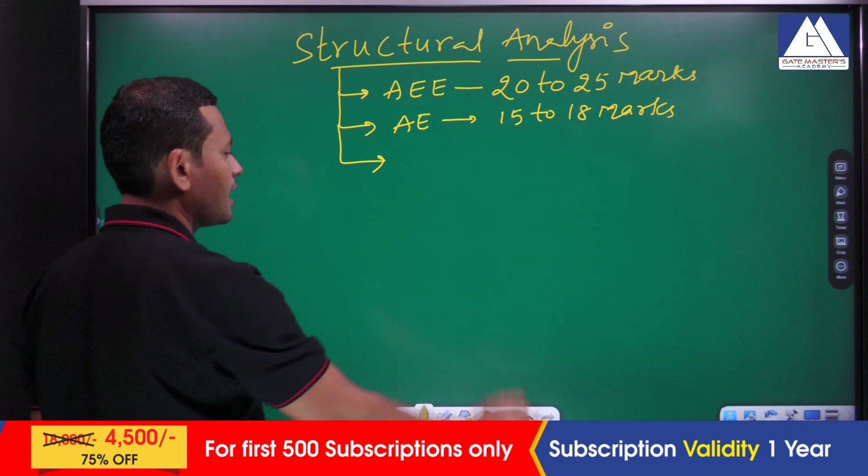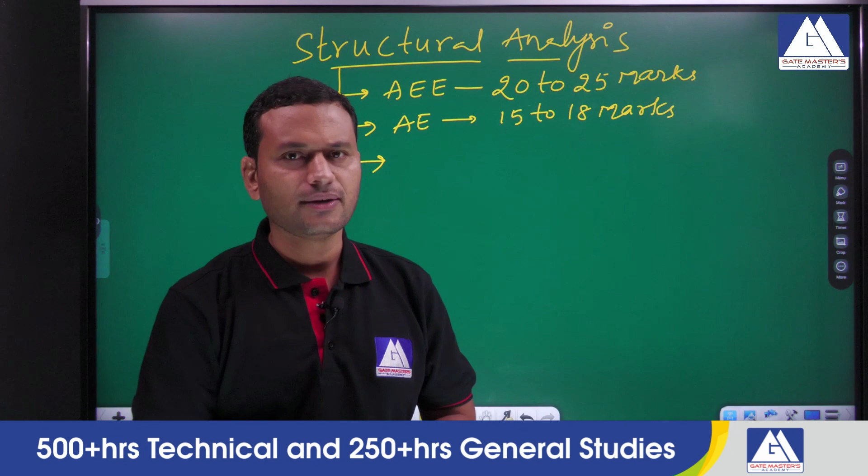Now if you look at the weightage in engineering service, it has two levels of examinations. One is the prelims examination, an objective exam, and the other one is mains, which is descriptive. In the descriptive exam you can expect about 80 to 90 marks, but in the objective, where all the subjects are given in a single paper, you can have a weightage of about 15 to 20 marks.

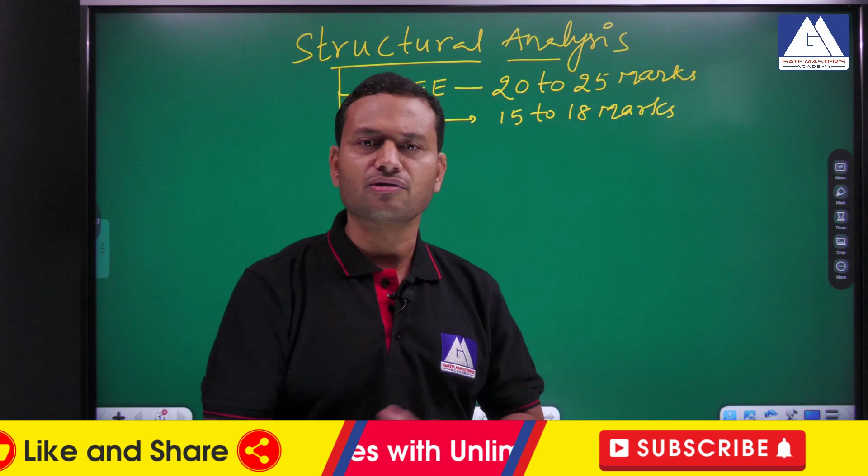And in SSC JE you can expect about 10 to 12 marks, because SSC JE is generally diploma level, so the weightage will be comparatively low.

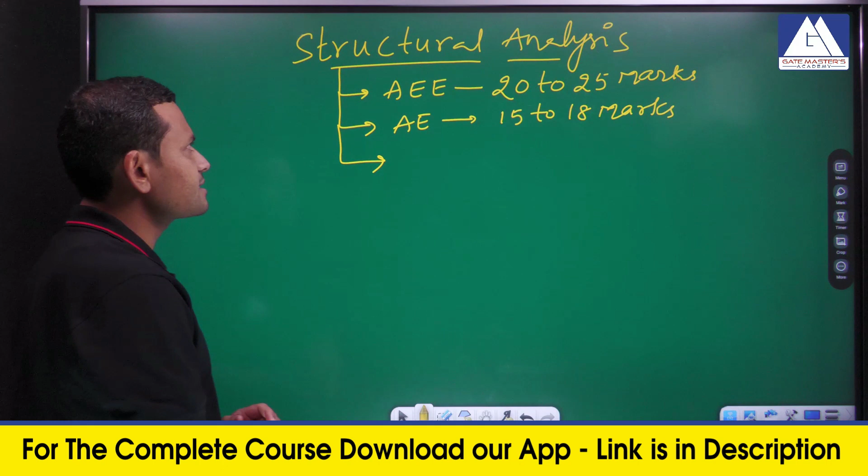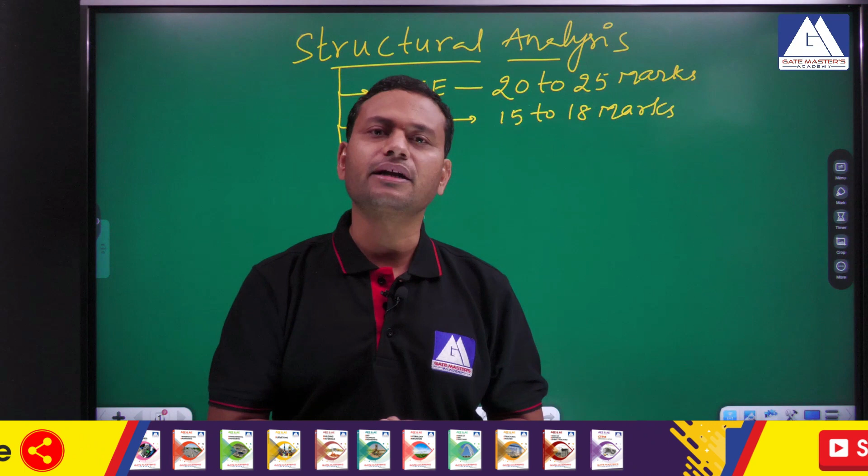So let us look into the references for this particular subject. Generally the class notes and the study material provided are sufficient, but if you want to understand in a better way, you can go for the standard references. But I strongly recommend that first you go through the study material and your class notes and practice the questions. If you want to gain more knowledge in structural analysis, you can refer any standard references. I am going to provide a couple, and you can also use references of your choice.

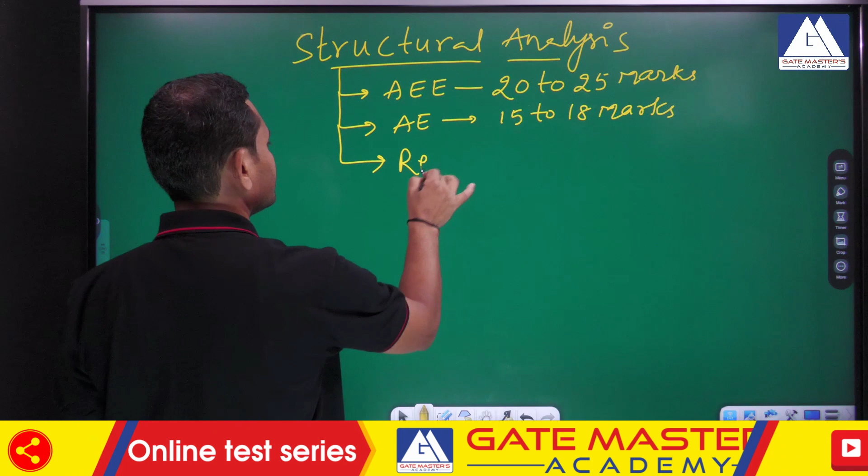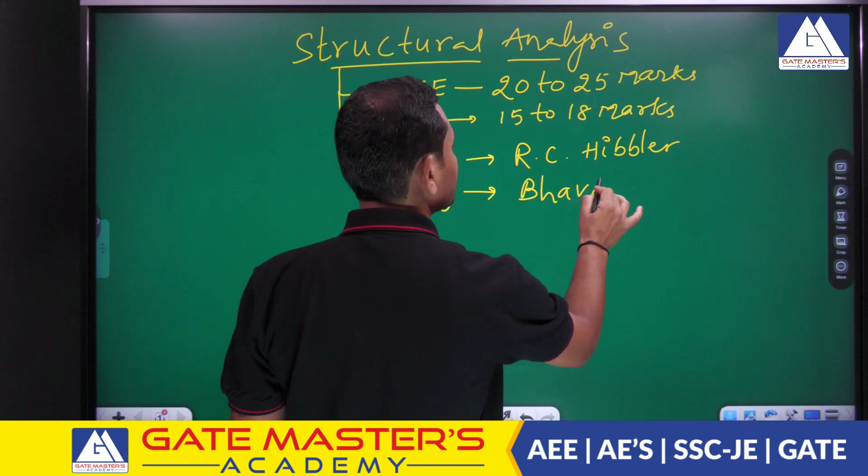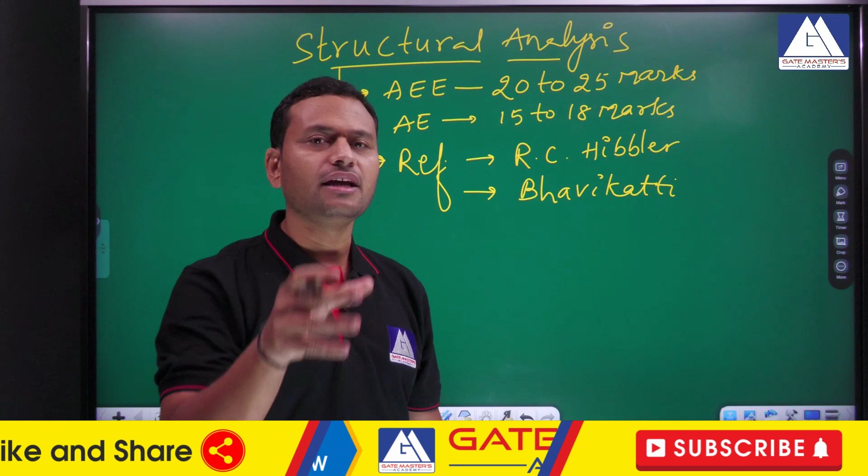So the references are: first one is R.C. Hibbeler, and the second one is Bhavikatti. Among these two, the first one is a very standard reference. If you refer R.C. Hibbeler, you will have varieties of questions, and the greatest advantage of R.C. Hibbeler is that the questions cover the entire knowledge of the topic.

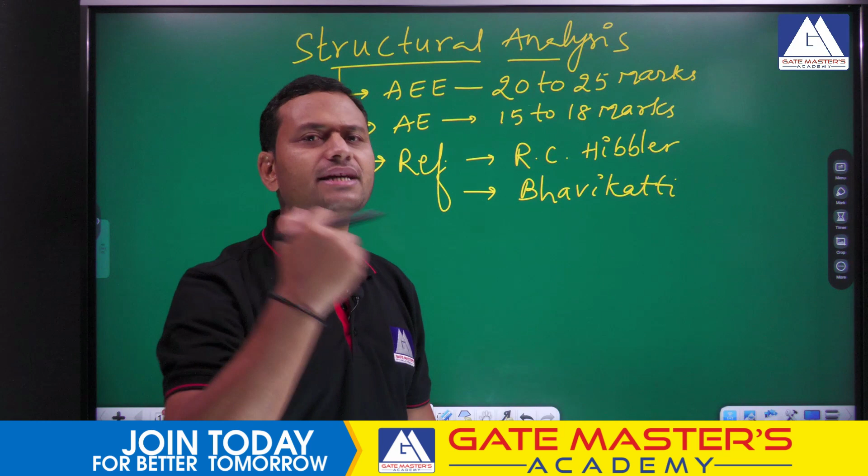If you solve all kinds of problems, then you can handle any type of problem you face in the real field. But the advantage of this reference is that it has more unsolved questions. So if you could solve all the questions, you will gain a good amount of knowledge and can handle any situation in the examination or in practical applications.

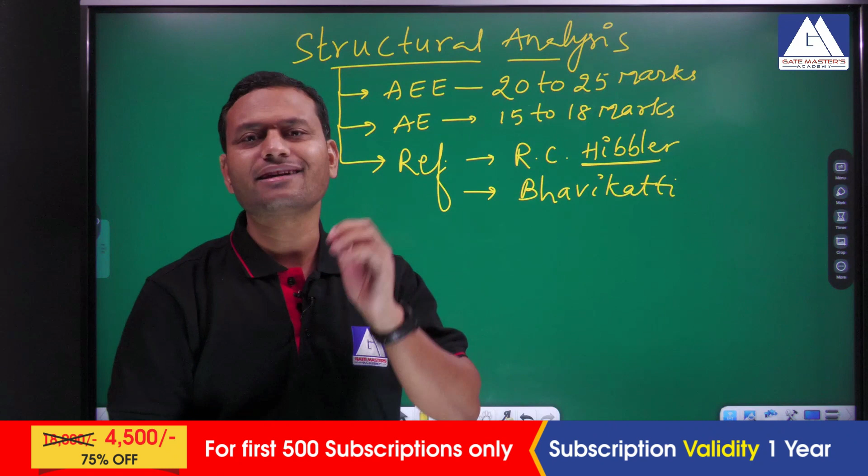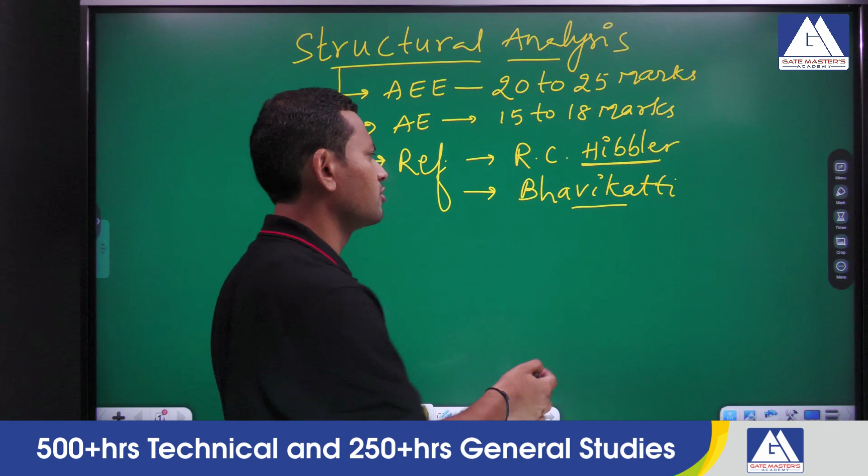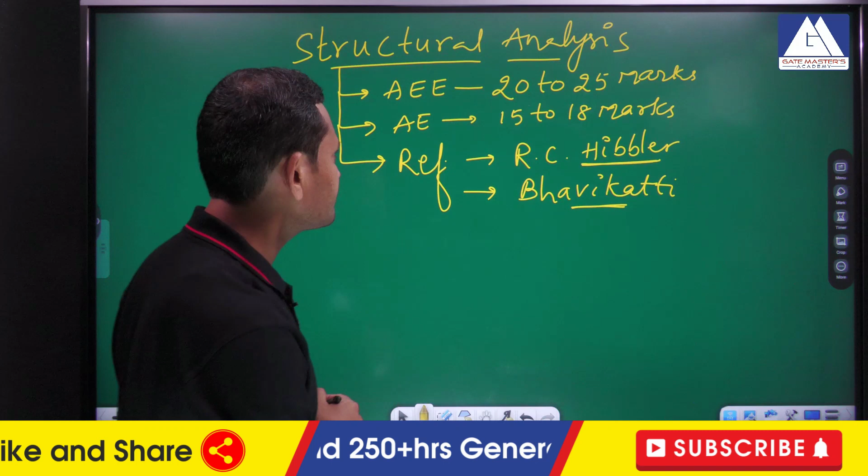And you can also refer Bhavikatti, as we are habituated with Indian author references, and you can also refer any other references which you feel provide a good amount of knowledge. So this is about the weightage as well as the references.

Now let us look into the course content or syllabus, especially for AE and AEE. From now onwards I will be using the shortcut SA for structural analysis. The first topic is basics of structural analysis. In it we discuss the basic definition of structural analysis, the assumptions, the basic structures, equilibrium equations, support conditions, support reactions, and the different types of frames with respect to their joints, frames as well as trusses.

So this topic will give an idea of what we are going to use throughout the subject. That is why it is called basics of structural analysis. The second topic is determinacy and indeterminacy.

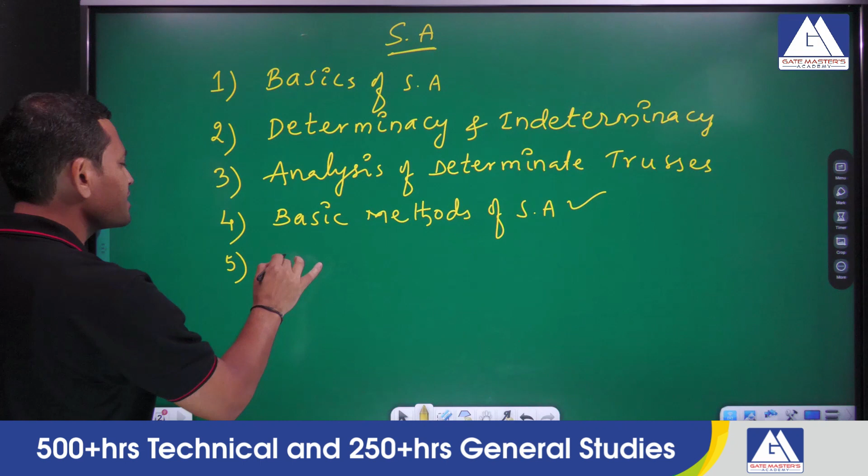So, in basic methods of structural analysis, we are going to discuss majorly two methods, which are the force and displacement methods, and then we will be discussing when to use a force method and when to use a displacement method, because both methods are used for indeterminate structure analysis. Then when to prefer a force method and when to prefer a displacement method. I mean to say, we are going to discuss the reason to choose a particular method for a given indeterminate structure. After this, we are going to discuss energy methods.

In energy methods, we are going to see how to determine the redundant reactions in case of beams, frames as well as trusses. It is also related to analysis of indeterminate structures. But we also have the concept of determination of displacements by using various methods. Okay. If you get the displacement, then by using displacement compatibility, you can go for determination of the unknown forces, right. So, majorly we are going to discuss three methods in energy methods.

One is called the strain energy method, the second one is called Castigliano's theorem, and the third one is called the unit load method. By using these methods, we will look into the unknowns called displacements first, and then after that we will also look into how to determine the redundant reactions or the additional unknown forces. Yes. After this, we have a next topic, moment distribution method.

Moment distribution method. Yes, this is one of the important topics for all kinds of examinations. If you look especially at engineering services or civil services, that is, descriptive exams, there you can expect one long question, especially for 20 to 25 marks, and this is one of the simple topics compared to all other topics. So, in moment distribution method, we are going to discuss which particular category of indeterminate structure analysis the moment distribution method falls under.

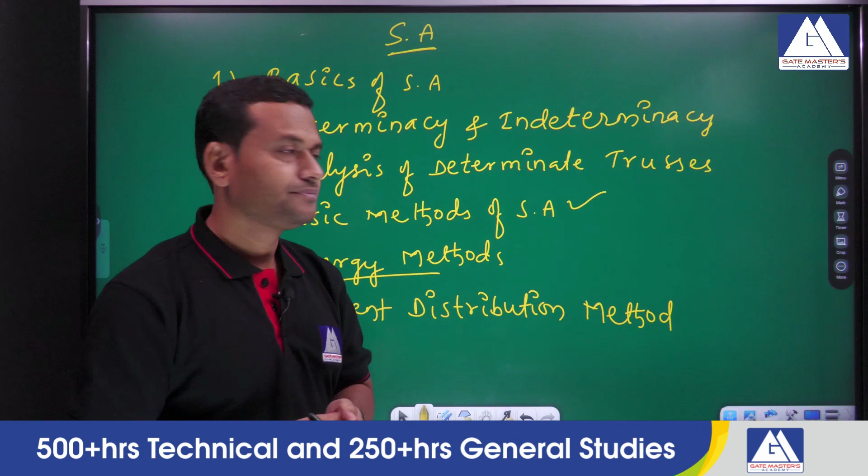Arch is nothing but a curved structure, right. So, for which type of structure we can apply moment distribution method, and how to determine the final moment. Why? Because whether we use force method or displacement method, our aim is to determine the final moment value, okay, or shear force. So, we are going to discuss how to determine the final moment, especially in case of indeterminate structure, by using moment distribution method, right. So, after this we have a next topic called slope deflection method.

Slope deflection method. Frankly speaking, slope deflection method and moment distribution method both fall under the same category, that is called displacement category. But what is the major difference between them? When moment distribution method is available, why do we have to study slope deflection method? So, in slope deflection method, we are going to determine the joint displacements, especially in case of indeterminate structures. But in the moment distribution method, we are not looking into the joint displacements, we are finding final moments directly without taking into account the joint displacements.

What we do, we take joint displacements as unit values, and then we go for determination of the final moment by using moment distribution method. And by using slope deflection method, we can determine the joint displacements first, and after that you can determine the final moments, right. So, if you are given a question to determine the joint displacements, then it is better to prefer slope deflection method. Once you get joint displacement, then you can go for determination of final moments.

But in moment distribution method, we directly determine the final moment value, right. So, if you are looking to get the final values, shear force and moments, then it is better to prefer moment distribution method. But if you are asked joint displacements, then you have to prefer slope deflection method. And even slope deflection method has applications in other topics. So, that is the reason you have to understand slope deflection method also, right. After this, we are going to discuss Kani's method.

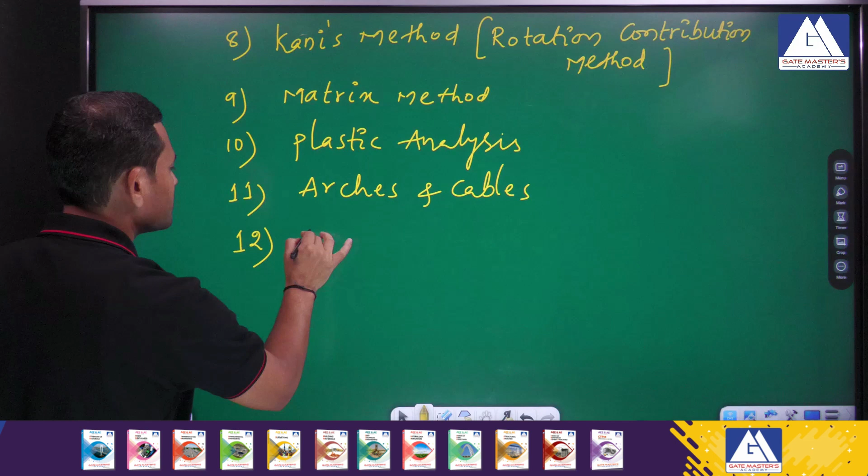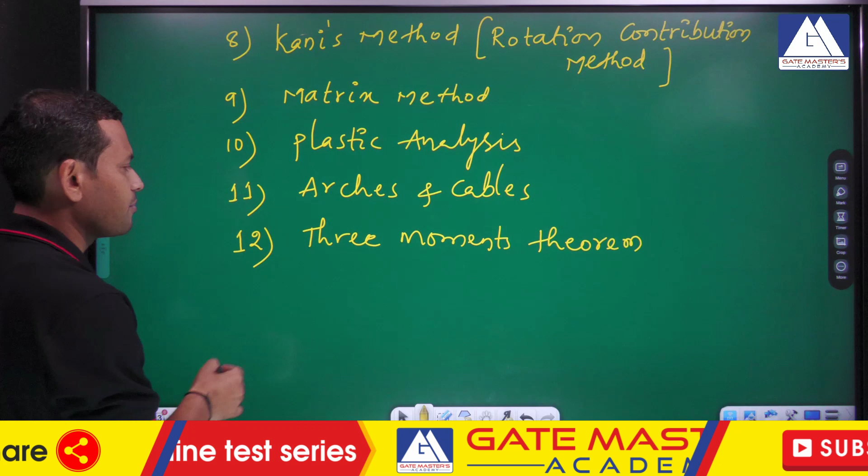After this, the next topic is the three moments theorem. Three moments theorem, also called Clapeyron's three moment theorem, since it is given by Clapeyron. And in the same topic, we are also looking into another method called the column analogy method. Column analogy method.

So, this is about the complete syllabus. Okay. So, you got an idea of what we are going to discuss throughout this subject called structural analysis. Okay.